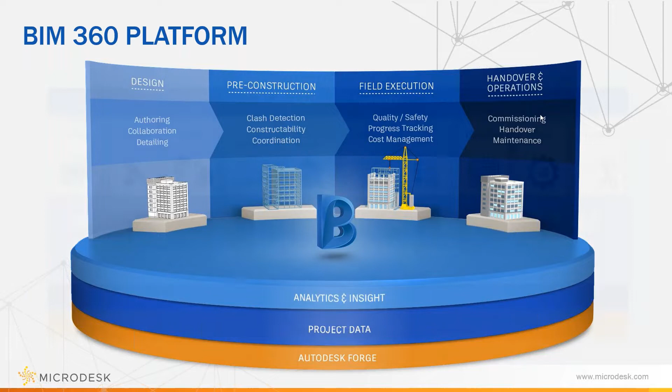And then on top of that Forge platform is your project data. That's where all of your project specific files live, and that's the data that comes onto BIM through the Autodesk Forge platform. That gives you the analytics and insight from the design or the project startup all the way into your handover and operations. The type of analytics and insight most people look to get out of BIM 360 when their project data is up in the Forge platform is the design. So your design files are typically up there.

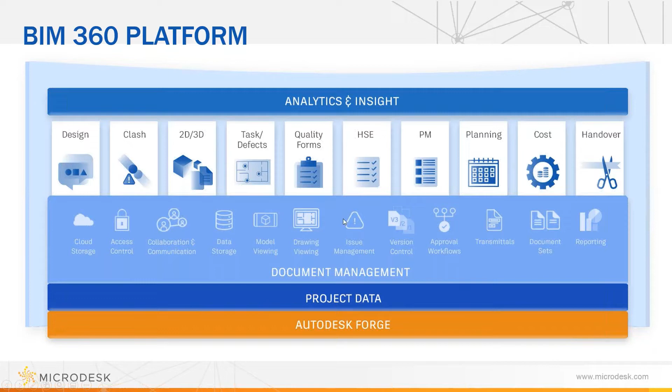Clash detection and clash sequencing, being able to run and host a lot of your clash files up on BIM 360. It has 2D and 3D support, getting your task defects, running punch listing in BIM 360 through an iPad, or doing your CA through BIM 360, and then all the way until you can do your cost management and handovers. So there's a lot of analytics and insight that BIM 360 looks to support.

So some of those supported workflows: the way it starts off is that on top of Forge is BIM 360 Docs. BIM 360 Docs is the base pillar between all of the main hubs of BIM 360. You see here on my screen, BIM 360 Docs at the bottom. That's your foundation, with these main pillars coming up. So you have Docs and its key functionalities, then BIM 360 Design that comes off of Docs, BIM 360 Coordinate, and BIM 360 Build with an add-on to cost management.

And then you can take it out to BIM 360 Plan as well as BIM 360 Ops for operations and maintenance within buildings. But Docs is that main platform where all of your project data lives, and then you use some of these other hubs to gain either additional tools or additional analytics and insight into that document data or project data within Docs.

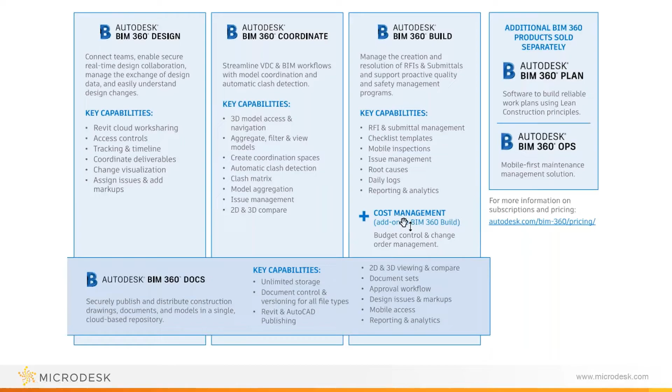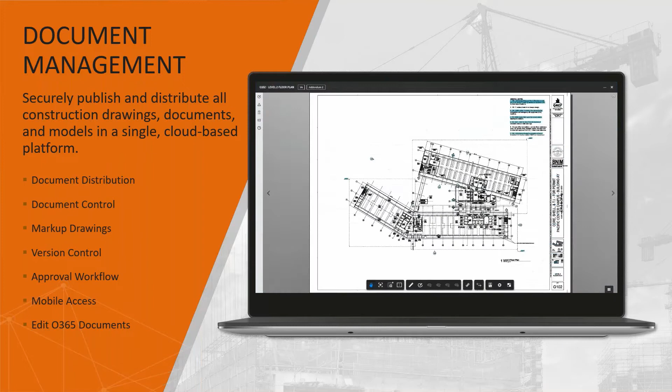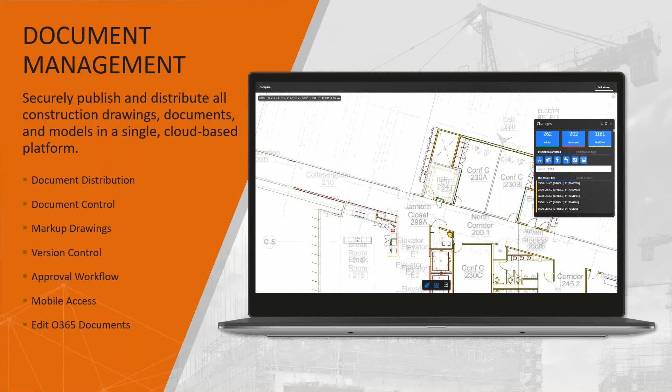So starting with document management, as project managers, there's a lot of functionality within the UI to maintain a project, whether that be document distribution, sending files out to project teams, internal or external, or sharing files with your owners or clients. You have different functionality within transmittals and simple file sharing, or you can do more formal review processes, and I'll go through some of these in a little more detail.

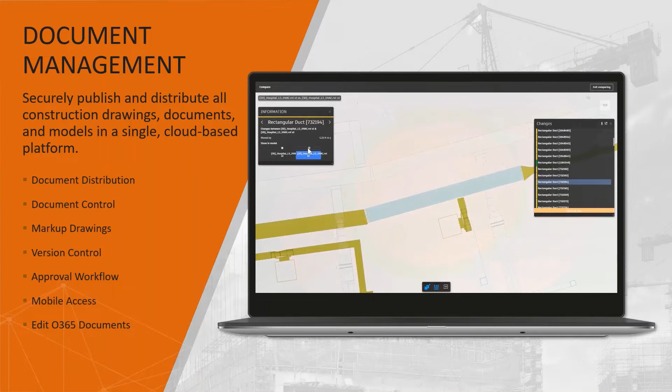Marking up the drawings on BIM 360, you can do personal markups, just notes for yourself as you're looking at drawings, or you can publish those globally so the entire project team can see those markups as you're marking them up. Versioning control, being able to upload and have all of those different versions up there, creating those approval workflows. And then it gives you that mobile access, whether you're working from your desktop, your iPad, your iPhone, or an Android. It's a very similar UI across all platforms.

And then the Office 365 integration, they now have that you can upload Excel and Word documents and be able to edit and view those within BIM 360 directly.

So if we start with document management, I'll pull up the document management here, and I'll start with the project admin. So being able to control some of the functionality as project managers, you'll get the project admin functionality, hopefully within BIM 360. So if you start, this is when you first sign in to a project, and you jump into the project admin hub of any project.

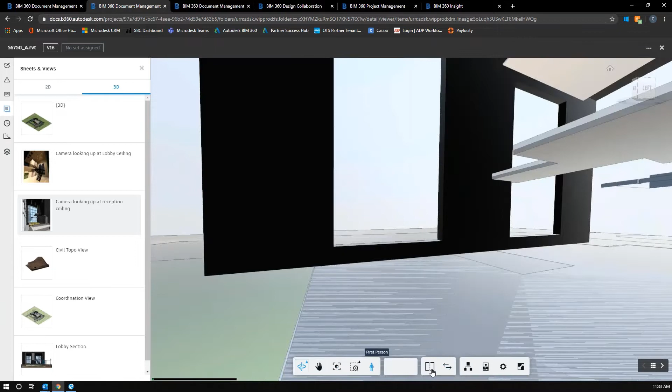Once you get files in for review, or you've shared those files out, what do you do with those files? When your team has PDF, Revit models and AutoCAD files up here, as project managers you have a lot of functionality. The first step is you can compare different versions. If I go under the architectural model, I can click on it, go into it, and click compare down at the bottom. It shows me that I can compare different versions of this model.

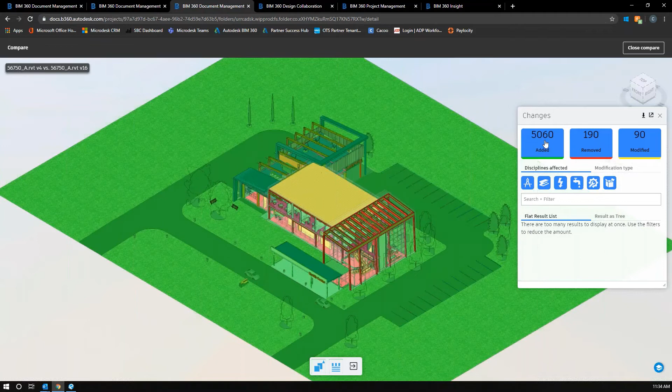When you compare it, I actually reran this prior to starting because it takes long enough. I wanted to show the difference between version 4 and version 16. It shows you green is added, red is removed, and yellow is modified, so you can see that data in 3D. I can see the production staff actually deleted the structural framing in here and re-added it as green instead of just modifying it.

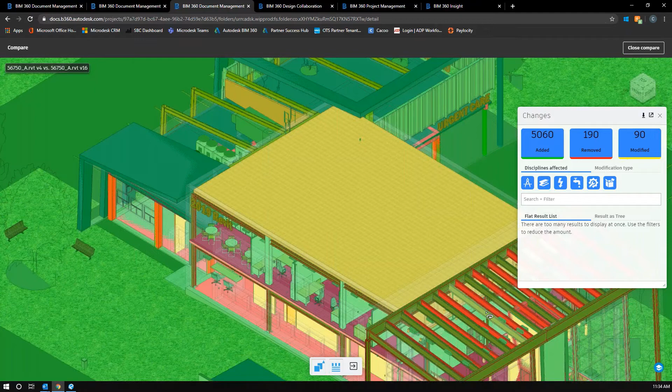So I'll be able to go back to my team and ask, why didn't you just shift these over or respace them instead of completely deleting and remodeling this whole thing? That was not time well spent when it came to modifying the structure here.

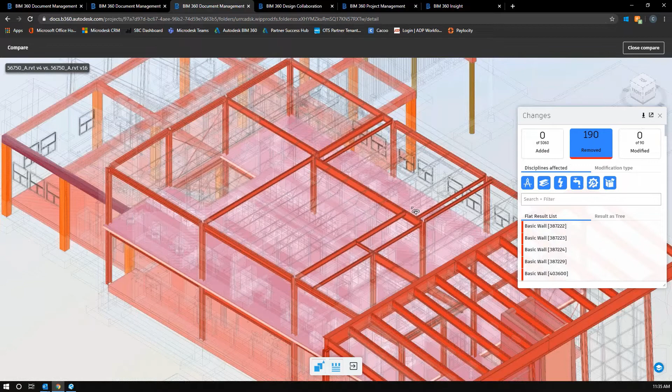You can see that they modified the roof and added a lot of data around the exterior here. There's a lot, and you can actually filter these down, so I can turn off and see what was specifically deleted in this model. I've turned off what was added and what was modified, and I can see all of this data that was deleted, or filter it to see what was added or modified, then get a full list of all the different items that were modified so I can specifically click on these and view them.

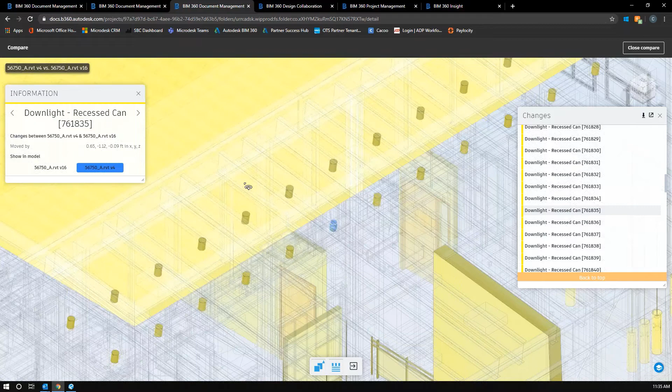You can see it's a recessed can that was modified from version 4 to version 16 here, and it was moved by 0.09 feet in the XYZ direction. So these are your X, Y, and Z coordinates showing how it was moved, allowing you to see fine detail of what happened within some of these Revit models.

Nowadays, as we're all working remotely, that's very important to see what our production staff is doing on a day-by-day basis or even an hourly basis, so we can keep track of what's going on in some of these models, being able to fine-tune some of these down.

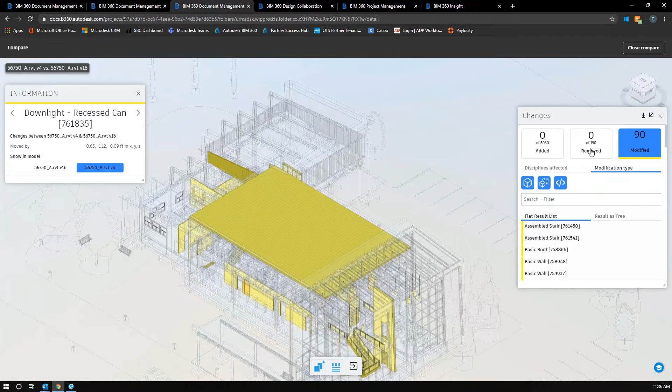So that is the compare functionality.

Other things you have when the Revit model is open within the BIM 360 viewer - you have the functionality to view 3D files, 3D views that are up here. They have to be published. So here's the coordination view.

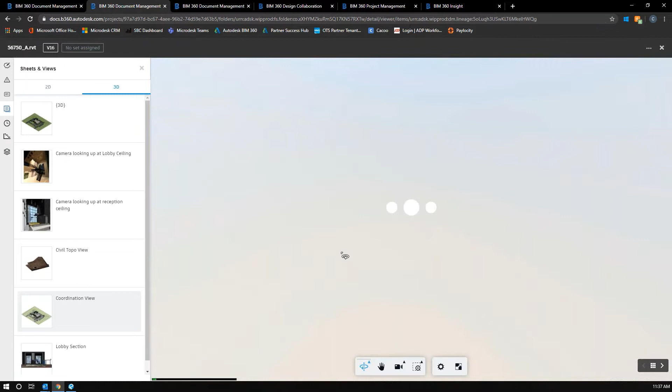You can go and see the 2D sheets that are up here as well, that come directly from the Revit model. So you don't necessarily have to have your project team constantly PDFing sheets, because you can pull that from here and actually print it directly from here too, so that if it's a big job and your production staff is PDFing once a week...

Typically those PDF processes - let's say you have 100 to 200 sheets in your Revit model - that could be an hour to 2 or 3 hours sometimes wasted, depending on if you have elevations with shadows on, custom crop boxes, things like that, where you may not want your production staff or designers specifically running those PDFs every week. You can just tell them to publish and have that directly up here.

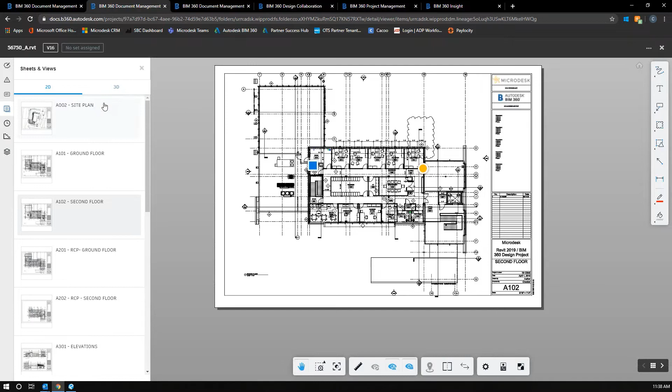And then you can print them yourself to a specific printer, whether it be half size or 11 by 17, things like that. Or you can just view them up here, mark them up, and do your issue tracking up here as well. So that usually ends up saving a lot of time, not having your production staff needing to PDF.

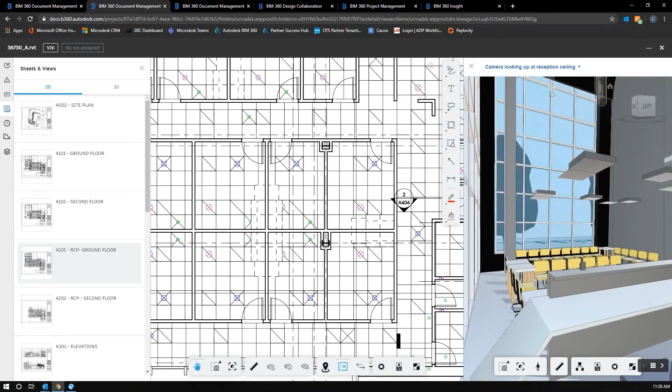While you're up here viewing things on the plan, you have some additional functionality - you can go into the split view mode. You may not have full knowledge of how to navigate around Revit, so as you're clicking on things - I'm clicking on the ceiling here - it's going to show me that in the split view mode in 3D, so I can see a little bit what's going on around that ceiling too.

So I'm not just viewing it in 2D functionality here, I can actually see it in 2D and 3D next to each other, so I can see how it was modeled - do they have this at the correct elevation, type of thing. So I'm doing a little bit more due diligence in BIM 360 itself, rather than just viewing a PDF that they may print on a weekly checking basis.

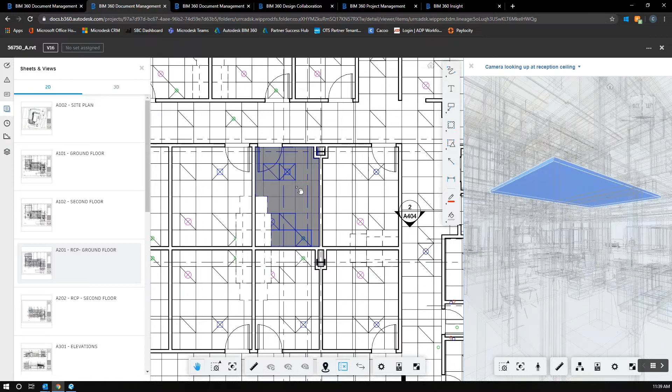The other thing you can do, if you want to see a little bit better in 3D view, is use what's called the place me function, where you can actually place yourself in a room and choose what camera direction you want to look at. So I'll look this way at the door. It's going to give you some navigation quick tips - how do you look around, how do you move around, type of thing.

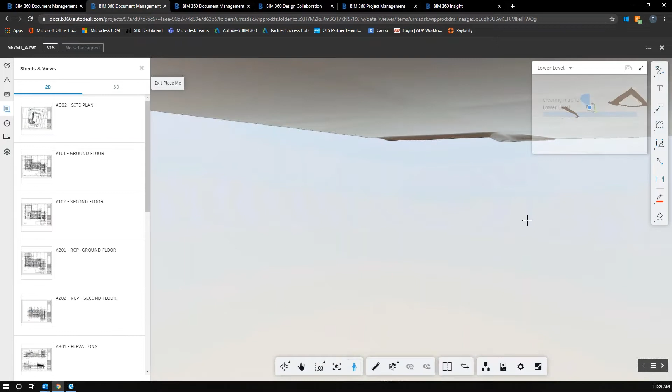And then once you're in there, looks like I'm below grade on this view, so I'll have to use those navigation tips to go up and down and get myself in here. Let me go back in there and see if I can view from a plan view instead of a reflected ceiling plan.

Nope. Not a good demo project for that.

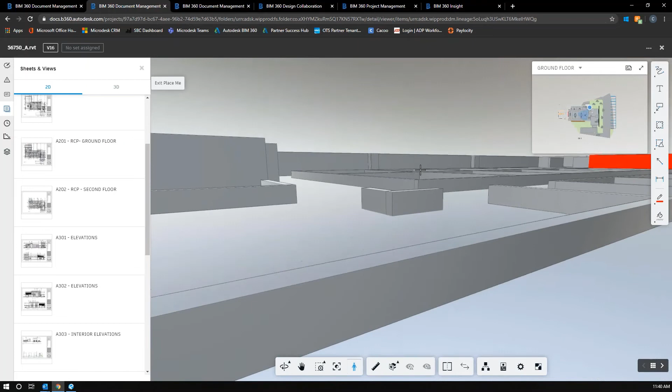See, it's really slow when I'm moving up into place. I'm trying to move up, but it tries not to go too quick because sometimes you can jump yourself out of a building, or too high or too low. So I'm using the E button to jump myself. There we go. Now I'm up into the building and I can actually see inside of this room and view around it a little bit better.

It all depends on how these floor plans were created and what the associated level is. As I clicked into this and did the place me, it pulled the associated level of maybe top of footing or something like that. So you want to make sure your team is actually setting up these Revit models properly. You can see some of these Autodesk data sets aren't necessarily set up how we always want them to be.

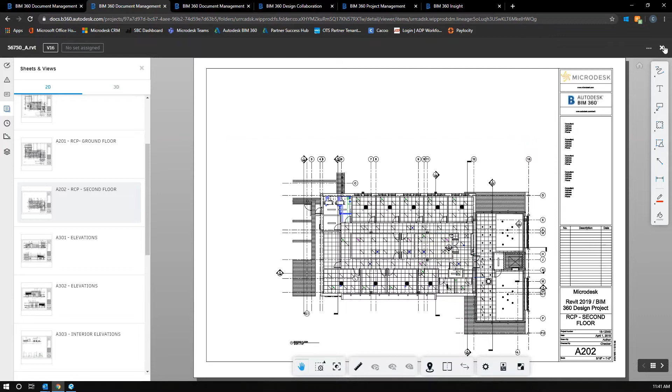So once you're up here and you've viewed some of this stuff, you're able to create some quick markups within what you're doing, whether it be freehand, placing text, clouding data, or clouding areas in here.

One thing you want to be sure of is that as you're clouding data or creating markups in here, you want to make sure you're changing how it's published, whether it's private or published, meaning it's public. That's a lot of questions I get nowadays, is that as I create these markups, why can't my team see them? It's because by default it does it private. So you'll want to make sure that as you create these markups, you publish it out to the team.

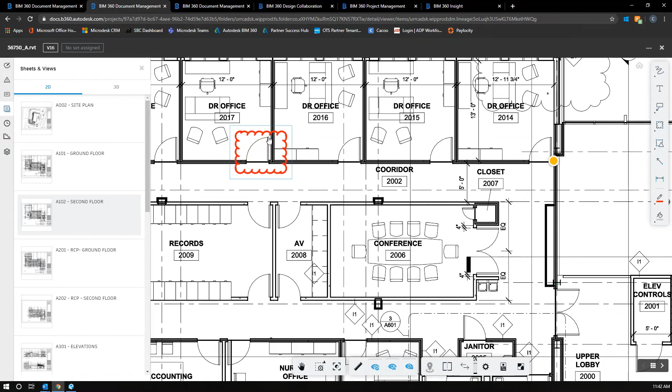Then hit save the markup, and it's going to be visible to the entire project team, or whoever has permissions to view these sheets or these Revit models.

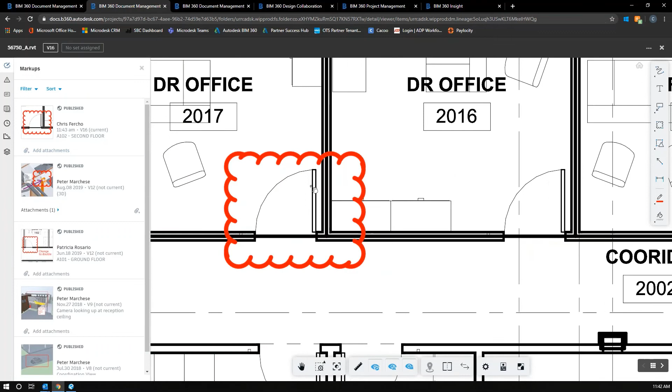So as you create those markups, you'll have this markup tracker going along the left-hand side here. You can see this is the cloud that I just placed. And if I made a comment that this is the wrong door or the wrong panel, I can actually add an attachment, maybe a specific cut sheet of a different panel or door width or door type, door mark, whatever it may be. I can add specific attachments so that whoever is going through these markups can gain additional data or information they may need to update this in the Revit model.

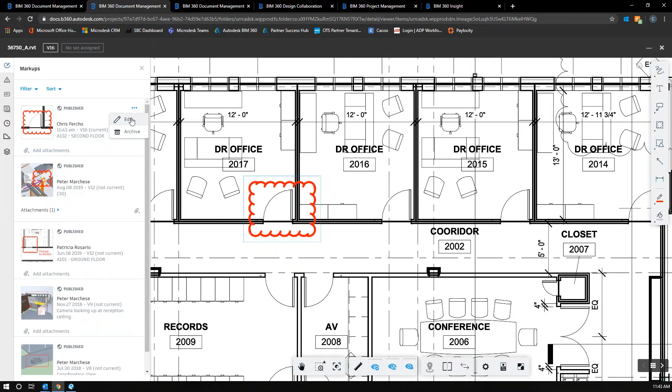And then once it's marked up, you can go through and edit it or archive it. If it's done, they can archive these as they complete them, and it'll go through and get archived, removing it from the list here.

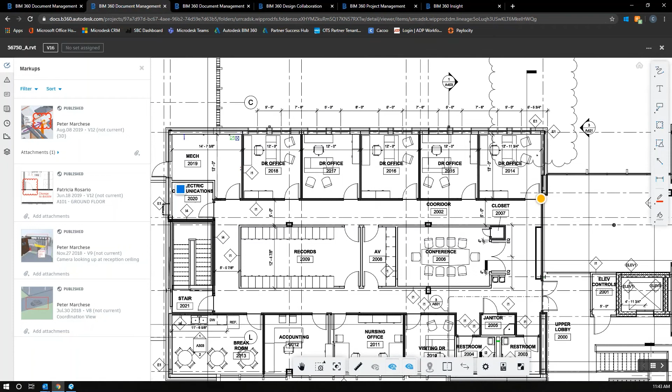The other option, instead of doing straight markups with the markup tool, is issue tracking. You'll see here you're able to create an issue. So if I want to do the same markup, but instead of clouding this, I'm just placing a dot on this door, giving it a type, this is the door type, and I can actually assign this to a specific user.

Who do I want to update this, from my production staff or from my design team as I'm making these markups? I can assign it to a specific person, or to a specific role, like all of my architects or designers, whoever I have set to specific roles, or I can go to a specific company so that everybody attached to that company gets a notification.

So I'm going to go ahead and assign this to myself real quick. And when do I need this update by? We can see these updates on the latest set, the latest print. I need these done by Thursday this week, because we do an updated set every Friday. Do I want to update specific location information in here?

If I don't need to, but I can add in a root cause, is it a design code compliance type of thing, documentation conflict, documentation incomplete, there's no tag for this door. I can make that comment, add a tag, and then I can create that.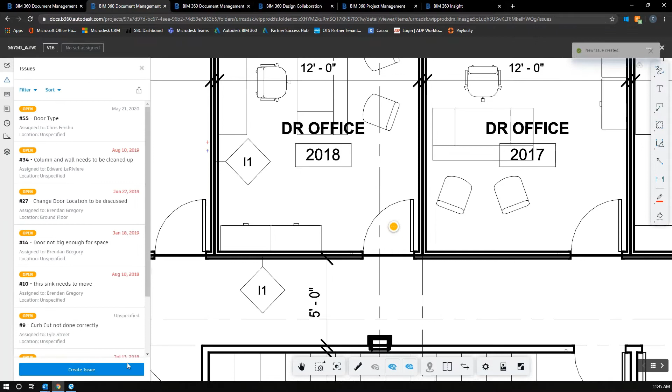Once I create those, it goes through a more formal tracking process versus the markup. Once I go back into my document management, I can go into my issues tab and see all of those issues I've created in a list format. Here's the latest one I created, door type, and I can click on it to see the linked document - I placed this in that Revit model - and the description that they need to add a tag. They can go through and make comments, or I can add different attachments. I can see the activity as it was completed, and it can actually be answered or closed out directly from here.

And then when I go do my weekly team meeting, I can export out all of these issues in a PDF report or a CSV report, so that when I get to my team meeting I can go down and do my due diligence with all of these open issues and say who's taking care of this, who's taking care of that, and make sure we're staying on top of these issues and they're actually being completed or taken care of by my design team or my production staff.

Okay, so getting back into folders. And the beauty of all of that being in BIM 360, I did that within the Revit model. I was in the architectural Revit model here. I created issues, I did markups, I was able to do the viewer, and that's all the same whether I'm viewing the Revit file or PDF files.

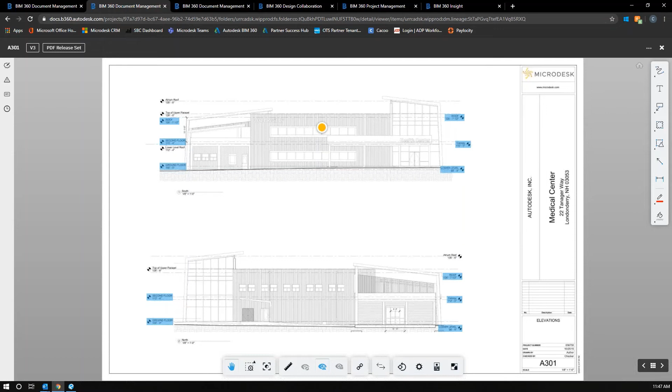These are some PDF files up here, so I'll open up sheet A301, and you can see the viewer is the same. I have my markup tools along the right-hand side, some additional tools along the bottom - measure, compare, things like that - and I still have my markup tracking and issue tracking along the left-hand side. So no matter what file type you're viewing, the BIM 360 viewer is very similar, it just gives you a difference in the functionality of what you're viewing.

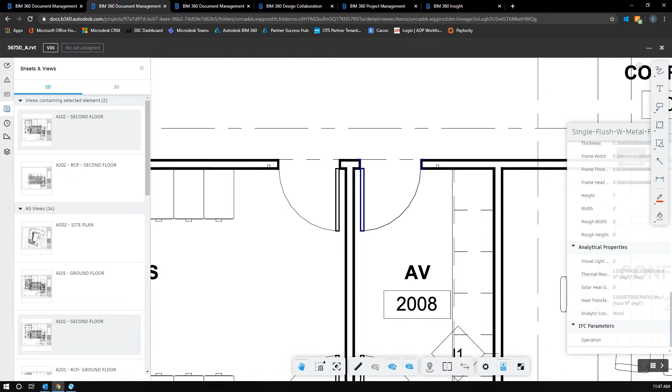So if I'm in the sheet view for 2D here, I can actually click on elements and view the properties. It's giving me additional functionality because I'm in a Revit file versus the PDF file. I can see that this is a single flush door, and view some of the properties, so I'm getting a little bit more informed data, also double checking that my production staff or design team is using the proper families or modeling accurately, things like that.

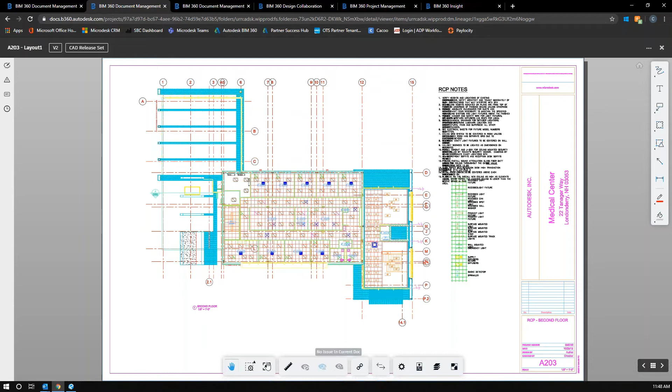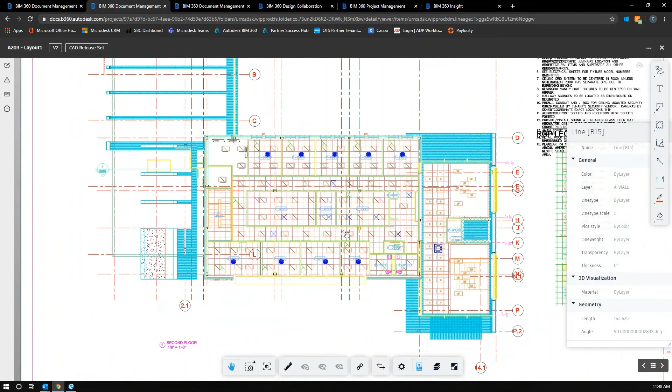And that works the same way with AutoCAD files too. So I've got CAD documents up here, and I can actually open up AutoCAD files in the same viewer. You can see here I have my markup tools and some additional tools along the bottom. Just like in Revit, I can click on a line and view the line settings, line properties, line type, layer information, color information - is my production staff actually showing the proper colors on the proper layers, things like that. So I'm doing some more in-depth checking instead of just viewing things on a PDF or a printout version of things.

And then some of the other added functionalities they have is being able to view Word files and Excel files up here. So these are all Word files, spec sections. I can click on these and it'll open up in the Word viewer. I can view Word files that are up here and actually edit them in the browser directly from here, and print it. So if I'm viewing this on my iPad, I don't have to go out and grab the Microsoft Word application and download that - I can do all of that within my BIM 360 iPad application, or even on a desktop or a Surface or a laptop, whatever it may be.

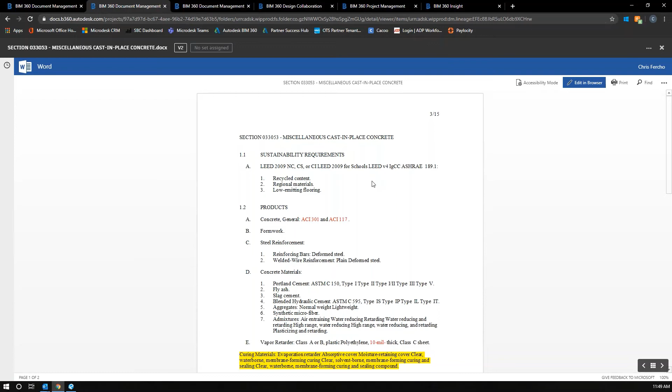Same way with Excel files that are up here. I think I have them under project schedule, maybe - yeah, project schedule. Excel files that are up here, you can see it opens it up in Excel format.

I see there's a couple questions. Is there a project schedule tool in any of the BIM 360 softwares? Not currently. It is in the pipeline that they are coming up with a project schedule tool.

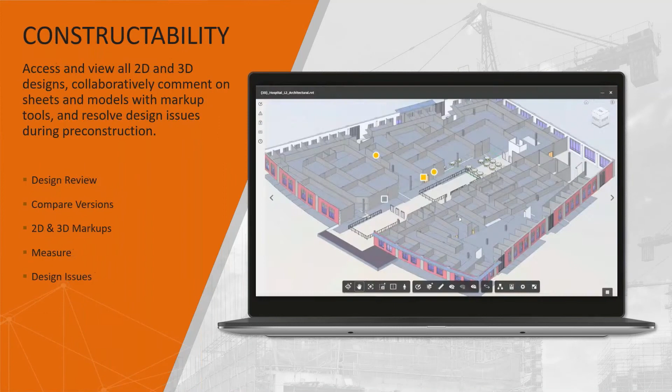Okay. So that's some of the functionality that you have within document management as project managers. If you have Revit files up in BIM 360 Design, you have some functionality within BIM 360 Design as well. Getting into design collaboration, that's where you have that Revit cloud work sharing, those live Revit models up in the cloud. You're able to review, markup, and issue Revit models specifically as they're up there.

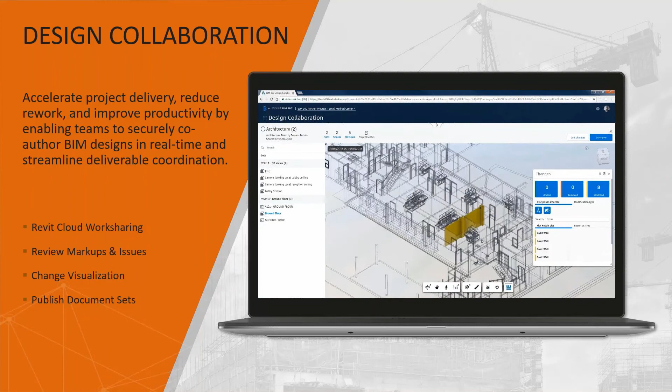You can see here, this is the design collaboration hub. You can be viewing the Revit models up here as well, not just in document management. And then you can actually see the progress using the timeliner up here instead of using the compare function within document management. There's a timeline tracker within the design collaboration module itself that you can use with the grip and the slider bar and see how the model progressed.

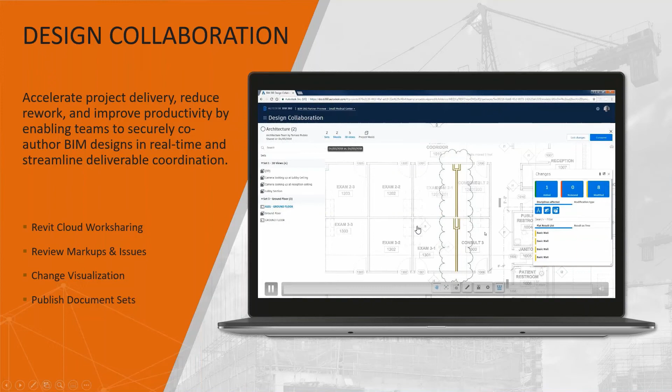You can also do the compare function directly up here in design collaboration. You see here what's added, what's removed, what's modified. It's very similar to the compare functionality within document management. You can do all of that within design collaboration as well.

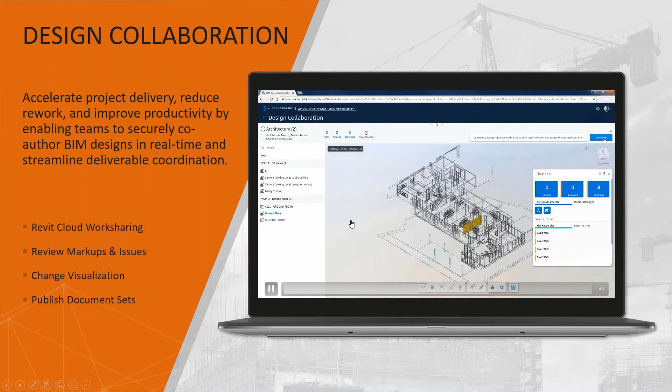You can change the visualizations up here, specifically you can turn the models into wireframe, just like you can within Revit. It's all at the click of a button, versus having to go into the Revit model and understand how to change visualizations using the view properties and things like that within Revit.

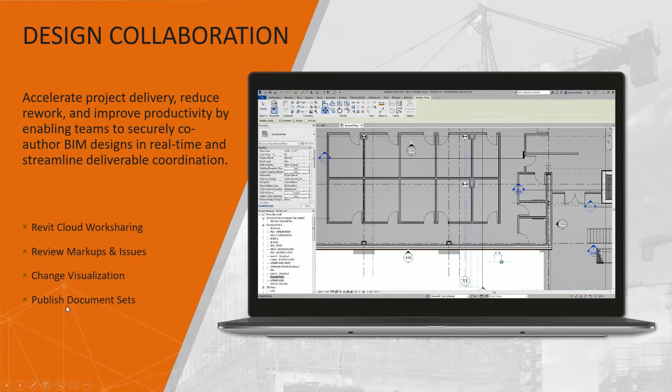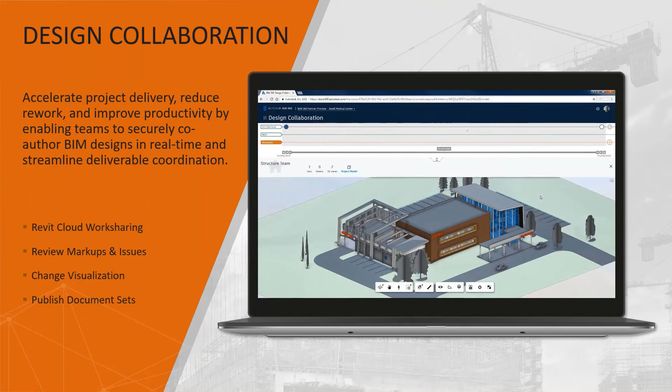And you don't specifically have to reach out to your team to be able to publish document sets. You can do all of that directly in the BIM 360 Design Collaboration Hub. You can open up a Revit model, be viewing it in there, and publish the latest set directly from there instead of emailing a project team member, a production team member, or a design team member and saying, hey, can you guys publish the latest set so that I can be viewing it? You can do it yourself directly from within Design Collaboration.

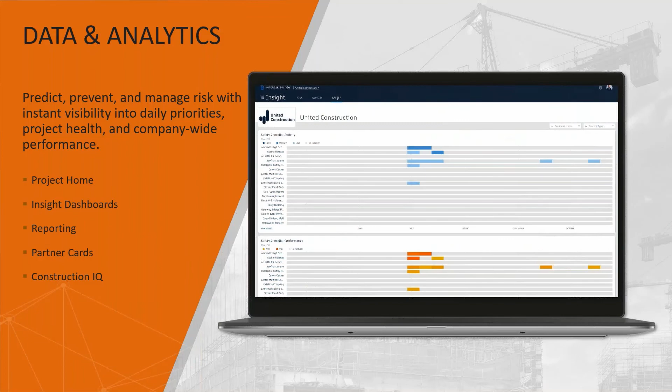A lot of project managers use this as a starting point for their weekly team meetings, with that global snapshot of issue tracking and what's going on with specific Revit models, the review workflows, submittals, transmittals, things like that. You can really get that global snapshot utilizing the Insight tab for all of the different types of data and analytics that are up there.

So why most firms, besides the obvious nowadays with everybody working remotely, are utilizing BIM 360 even coming out of COVID is because of the functionality. It's connecting your project teams, not just your remote team members, but internal and external team members. So it's connecting your architects with your MEP engineers and your structural engineers.

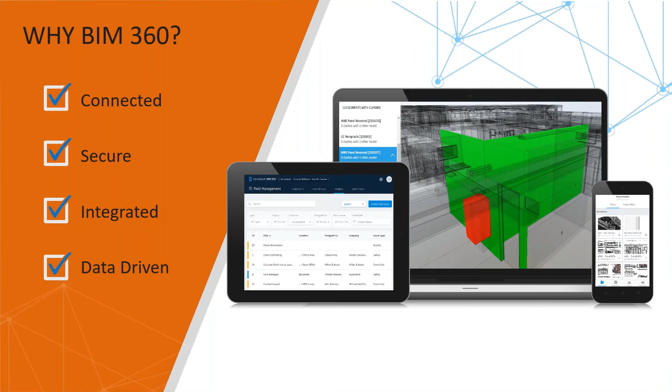And it's also connecting multiple offices, not having to use Revit server or a different mirroring solution that you're posting your central models up into for working in those work shared models. It makes it a lot more streamlined. The security follows a lot of secure protocols that AWS has. The separate integrations that it has, and then the data driven.

So mobile, giving you the connected mobile aspect. We're not just working from our desktops or our laptops anymore. It's giving me project insight at my fingertips. There's a question up here: are there separate fees for each version of BIM 360 Docs versus Design versus Project Management? Yes, there are.

Except for the fact that if you get a BIM 360 Design license, it comes with Docs. If you get a BIM 360 Build license, it comes with Docs. All of those different licenses rely on Docs, so if you get BIM 360 Coordinate, you still get Docs with it too. Good question.

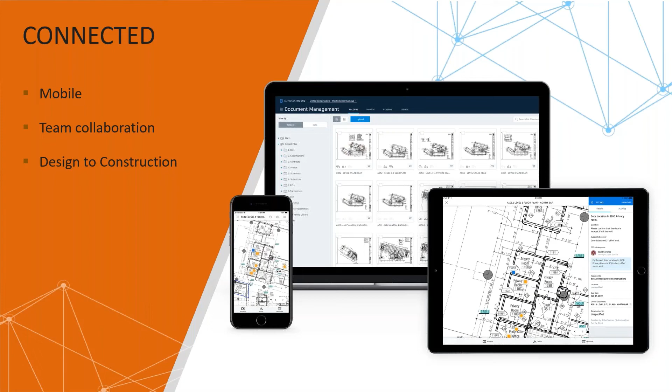So like I said, the security protocol: because it's on AWS, it follows SOC 2 compliance, ISO, and a lot of other security certificates that it has with AWS. So if you're looking for specific security certs, reach out to us and we're happy to collaborate with Autodesk and see if we can get specific security certificates for you guys.

Last but not least, the integrations that it has. Because it's built on the Autodesk Forge platform, like I said in the beginning, it gives third-party softwares and Autodesk partners the capability of creating their own integrations. So there is a full list of integrations that grows on a monthly basis.

You can see the full list at integrations.bim360.autodesk.com. There's even integrations for Office 365, connecting your OneDrive into BIM 360, or your Box Drive or Google Drive. So if you're utilizing specific software within your current workflow, just check to see if there's an integration out there. It doesn't hurt.

Okay, so I will open it up now to any specific questions that anybody may have. I'll unmute everybody, so if you want to unmute yourself and ask a question verbally, go ahead.